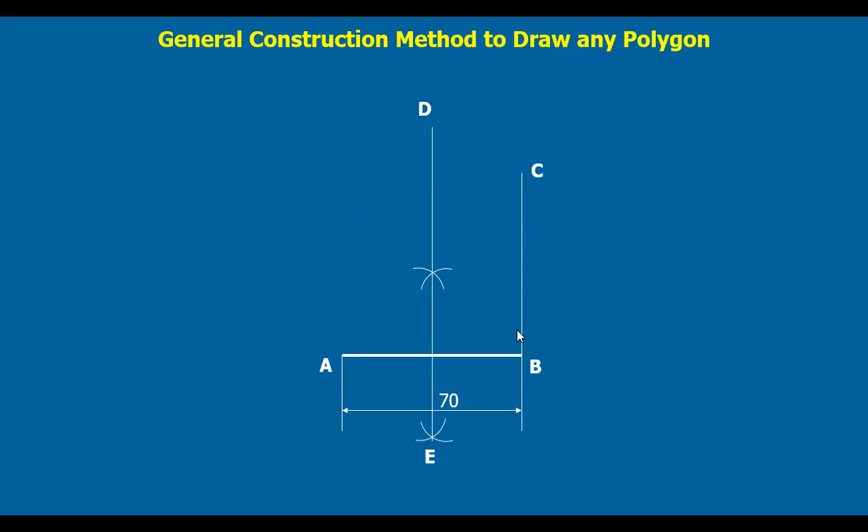Now draw a perpendicular bisector to AB, which we already know, and extend it. Say I call it DE. Now at B, draw a line perpendicular to AB, and mark BC equal to AB. C is at the same distance from B as A. Now join A with C by a straight line.

B as center, BA or BC as radius, both are same. Draw an arc joining A and C. This arc and this straight line intersect the bisector line at 2 points. I name this point as 4 and this point as 6.

The meaning is, if I take point 4 as center, 4A and 4B are equidistant. With 4A as radius, if I draw a circle, within that circle you get a square, a four-sided figure. If you take 6 as center, 6 sides means hexagon. So point 6 as center, 6A as radius, draw a circle and within that circle you get a six-sided figure, hexagon.

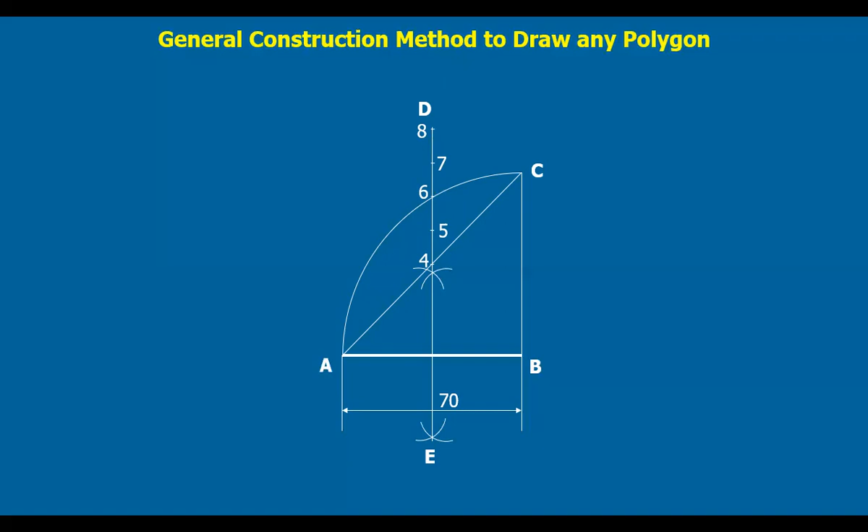I want to draw a square, a 4-sided figure of 70 mm sides, using this general construction method. I have followed the same procedure. Now, with 4 as center and 4B as radius, 4A is also the same, we draw a circle.

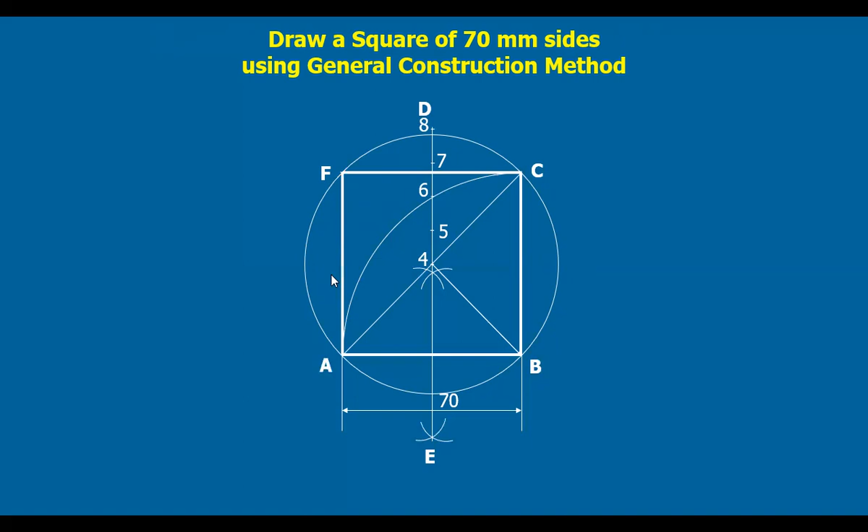Now take AB as radius. From B, we already have a point. From C, with the same radius, draw one arc that intersects this circle at point F. Join these points A, B, C, F, and A. That gives the required square. So this is the way of getting the square.

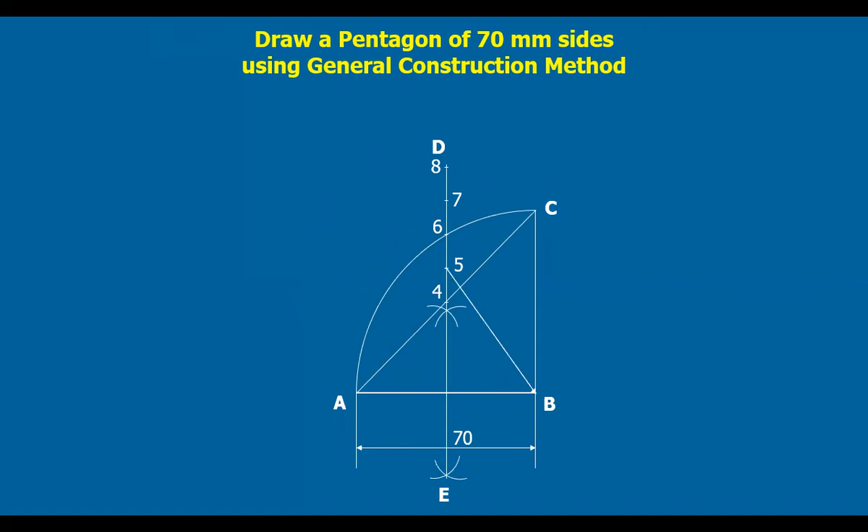Now I want to draw a pentagon of 70 mm sides. In the previous video we saw the specific method of drawing a pentagon by taking the angle between the sides. But here we are going to see the general method. Pentagon means 5 sides. Take point 5 as center and 5B as radius, and draw a circle.

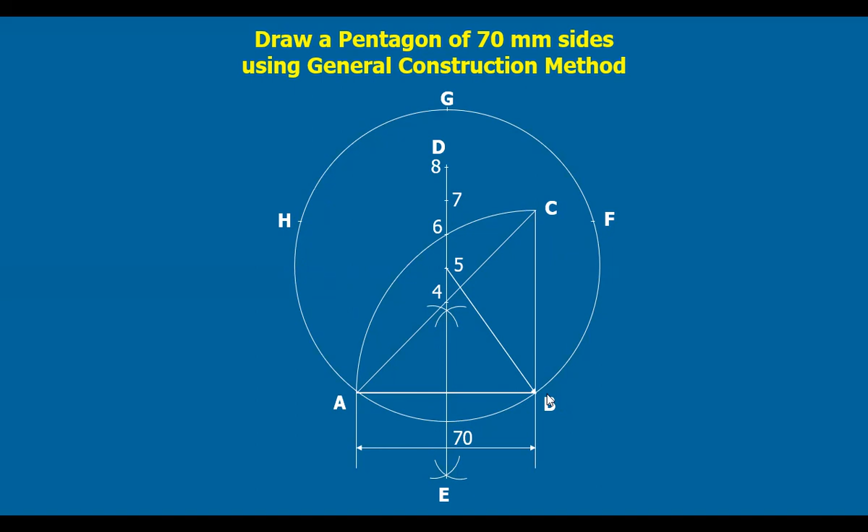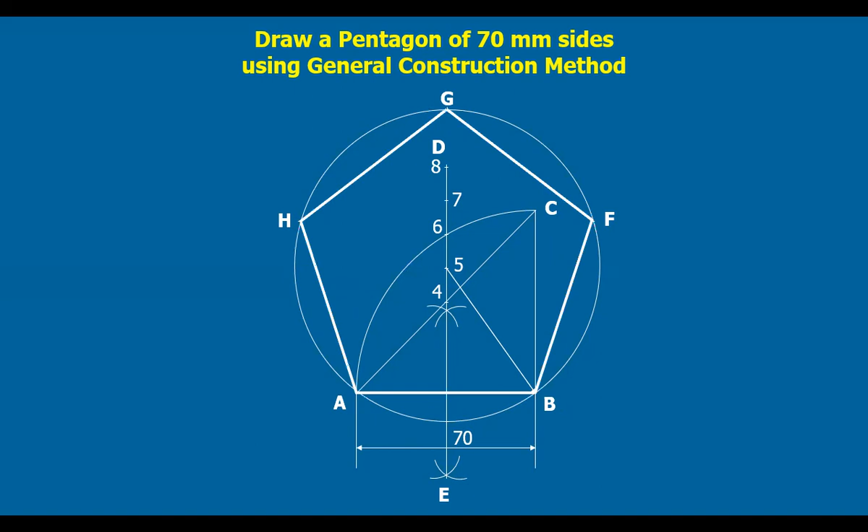AB, that is 70 mm, as radius, B as center. Go on intersecting this circle at different points. You get F, another point G. From G, mark another point H, and from H, draw an arc that exactly coincides with A. Now we have 5 points on the circle, A, B, F, G, H. Join them by straight lines and you get a pentagon like this. So this is the way of drawing a pentagon.

Now let's draw a hexagon of 70 mm sides. Same procedure, but hexagon means 6. So I take 6 as center, 6A as radius, and draw a circle. Now AB as radius, that is 70 mm, B as center. Cut this circle at one point by drawing an arc. We get an intersection point.

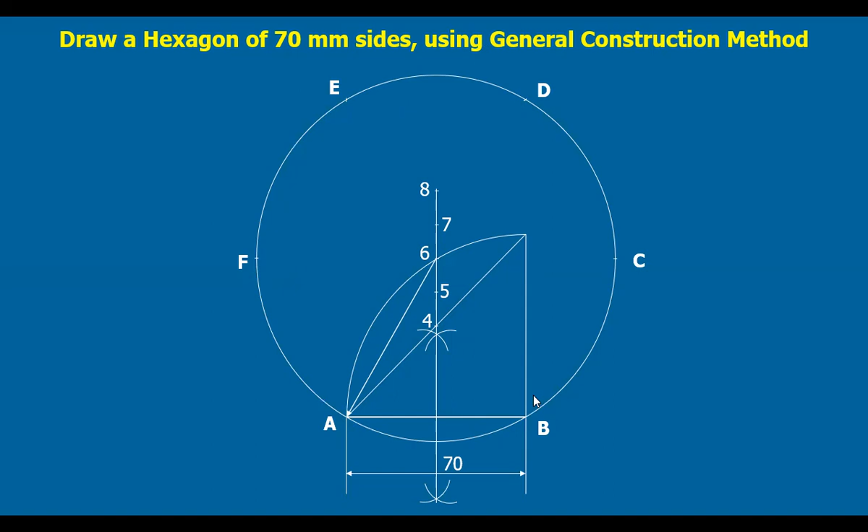That is C. From C, draw another arc to get another point D. From D, draw another arc that intersects at E. From E, F. From F, it exactly coincides with A. So I got all the 6 points; join them by straight lines like this: A, B, C, D, E, F, A. That is the required hexagon.

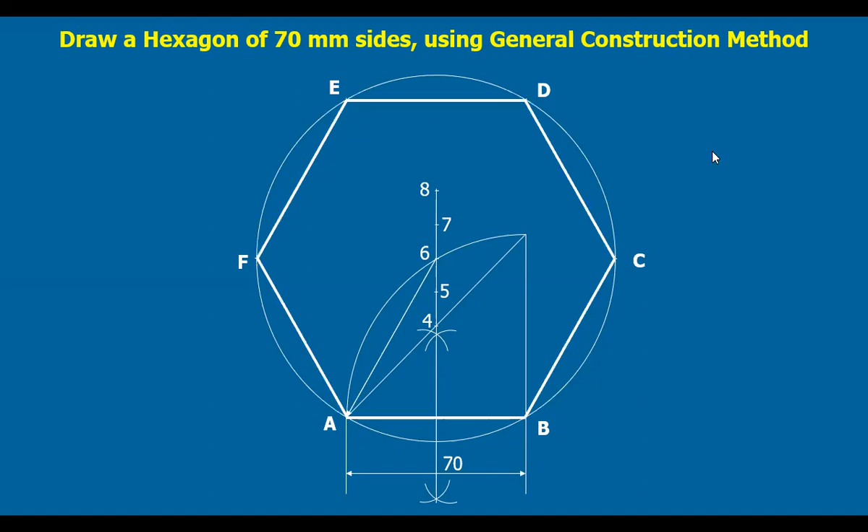Suppose I want to draw an octagon. That means I take point 8 as center and 8A as radius. Suppose this side is 50 mm only. Whatever the length of the edge, draw this side of the same length. We have followed the same procedure as earlier. We mark points 4, 6 and the midpoint as 5. Extend the 4-5 or 5-6 length upwards from 6: 7, 8, 9, 10 like this.

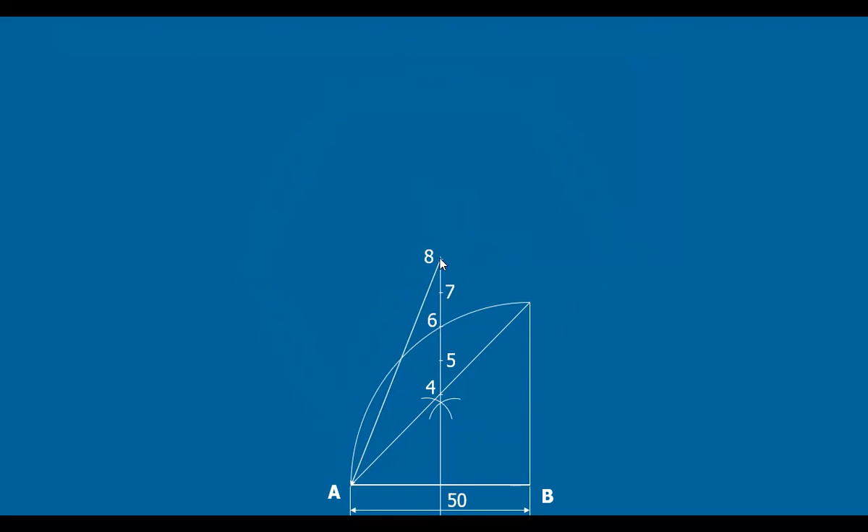Now we have taken 8 as center and drawn a circle with 8A as radius. With AB as radius, from A we already have B. From B, draw an arc and mark one point, and like this, with the same radius, go on marking the points. You get 1, 2, 3, 4, 5, 6, 7, 8. 8 points on the circle, exactly at the same distance.

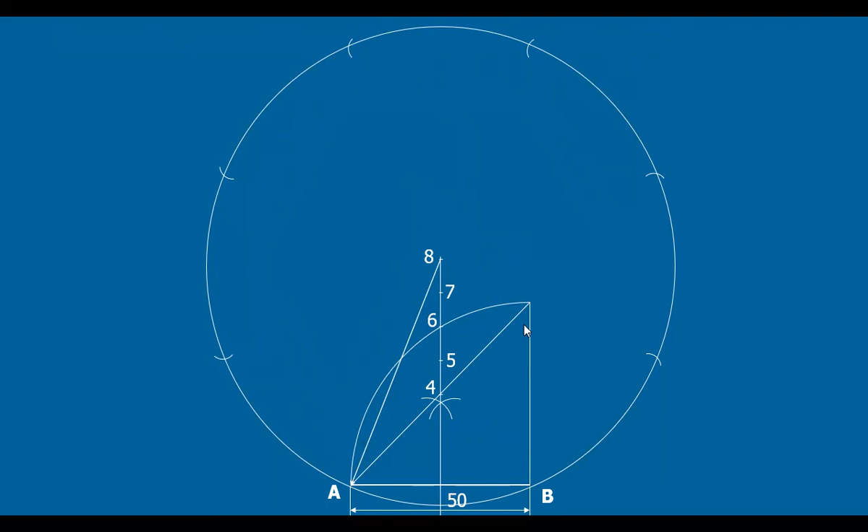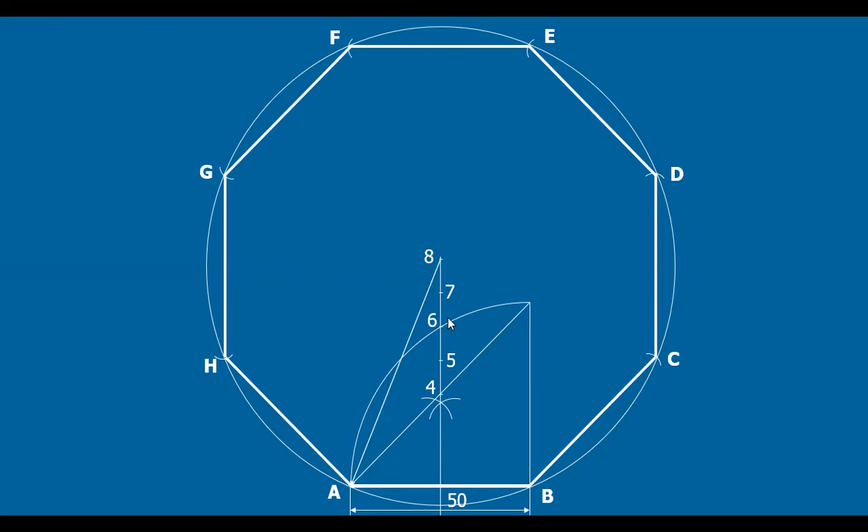Now mark them C, D, E, F, G, H and join them by straight lines like this. You get the closed polygon, and that is the required octagon, an 8-sided figure. So with the same method, you can draw a polygon with any number of sides. Here we have seen the general construction method. In the next video, I'm going to tell you a very simple method of drawing a hexagon.